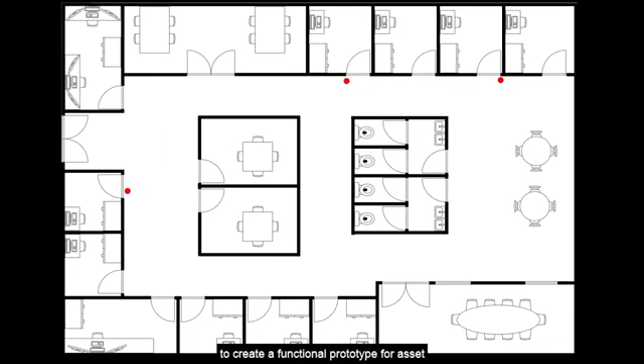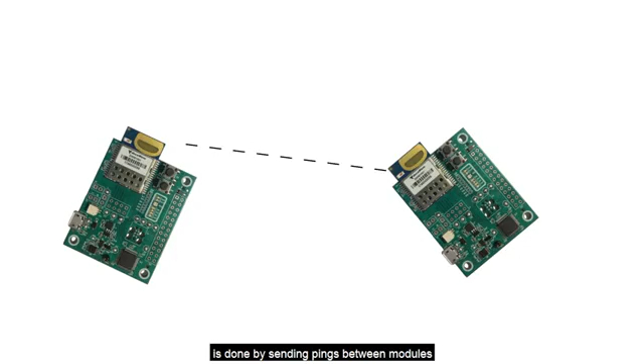Locating items or people when their whereabouts are continuously changing is a difficult and time-consuming task. This senior project was designed to create a functional prototype for asset tracking based on existing trilateration technology created by Decawave. Using this technology, two-way ranging is done by sending pings between modules and using time-of-flight calculations. For real-time position, trilateration is used.

There are two situations considered in this senior design project. The first is called the proximity solution, which involves tracking assets with respect to a specified vicinity. It consists of one base unit and multiple field units. The base unit has three user-customizable distance boundaries for field units. The distance to field units is measured and sent to the mobile application using Bluetooth. Alerts will be triggered on the base unit when field units move out of the user-selected range, both audible and visual.

Upon proximity setup, the user will be able to view the base units within the mobile application once they are powered on. The application connects, then assigns the base unit a PAN ID. Buttons between the field unit and base units are pressed to pair them through Bluetooth Low Energy. The application then receives and stores the information for each field unit paired to a base unit. Runtime can then occur with at least one field unit and base unit. While runtime occurs, the user will still have the ability to modify range distance and sensing mode. Lastly, the user may power up additional field or base units. Powering off the units will remove them from the system.

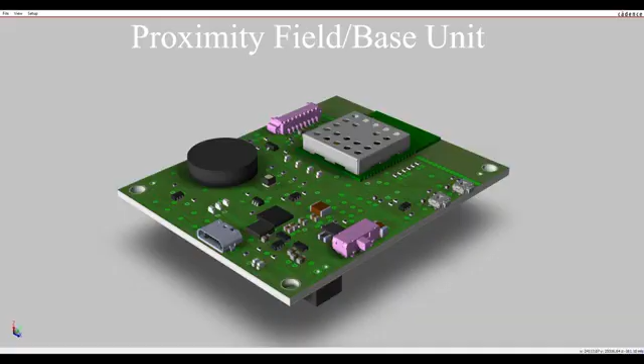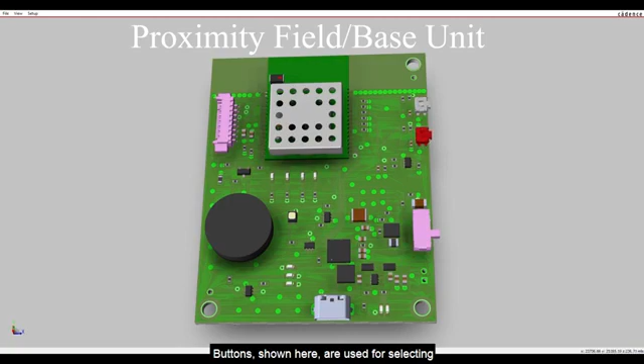This is the proximity solution PCB used for the field unit and base unit. This board includes optional population for the base unit that adds extra alert hardware not included on the field unit. The central component of this board is the Decawave module, used for distance measurement and communication to the mobile app over Bluetooth. A micro USB connector is used for powering the device and charging the included lithium-ion battery. Buttons are used for selecting between the three distance ranges and to pair together field units and base units. LEDs show the user which distance range is currently selected.

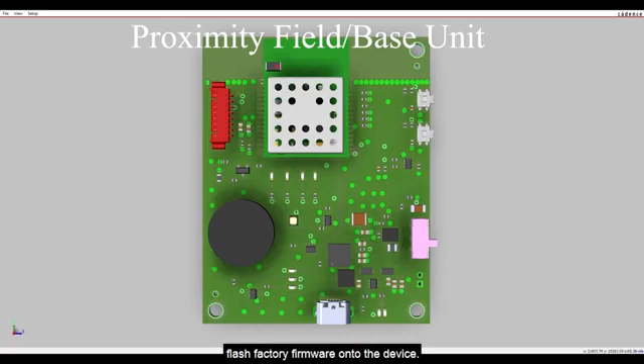Visual and audible alerts let the user know when a field unit has left the desired distance range, using a buzzer and high-power LEDs. The programming connector is used to flash factory firmware onto the device. The battery connector, shown here on the underside of the board, allows for easy stacking of the PCB and battery inside the enclosure.

To get to the proximity solution on the mobile application, we select it from the main menu upon app startup. On the proximity page, we see that every base unit available to the phone over Bluetooth is displayed. Each of these base units can be expanded to show their paired field units. Each base unit and field unit can be selected, and their fields can be edited. For the base unit, you can change the name, short, medium, and far distances, as well as the mode, leaving or entering.

Leaving mode of the base unit means that when each tag leaves the range of the base unit, an alert is triggered on the base unit. Entering mode means that when a paired field unit comes within the range of a base unit, it triggers an alert on the base unit.

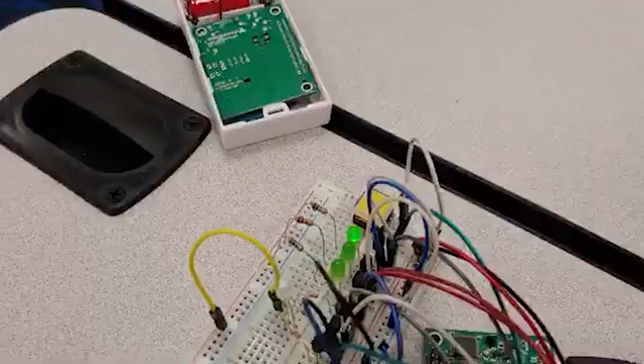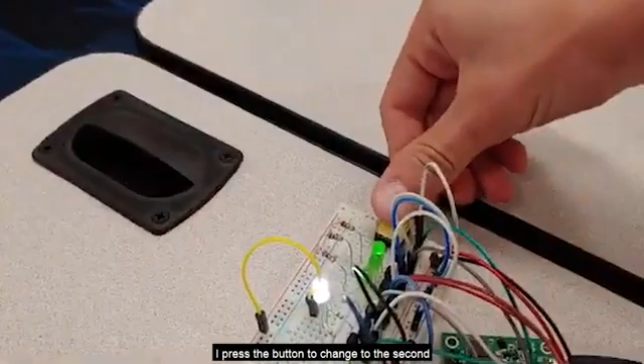This is a demo of the proximity solution. As you can see, there's one LED on showing that this is in the minimum distance mode, currently set to half a meter. As Nolan walks away with the device, once he passes the half meter mark, the LED showing the alert comes on. I press the button to change to the second distance, which is now 1.5 meters.

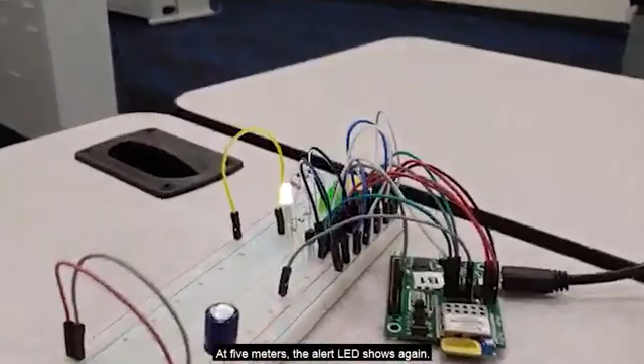As he walks away there, at 1.5 meters, the alert shows again. I press the button to switch to the furthest distance range, which is 5 meters. Nolan will now walk away with the field unit. At 5 meters, the alert LED shows again. As Nolan walks back, the alert will dissipate. Right there.

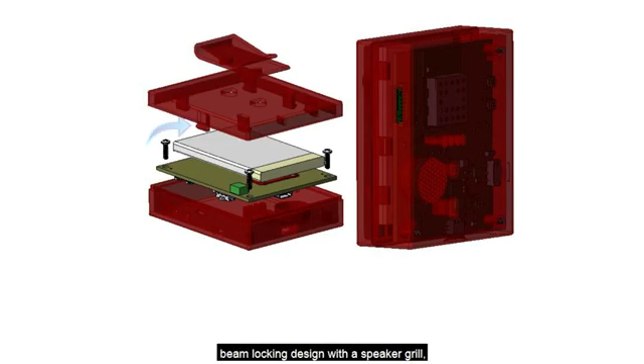The proximity solution utilizes a single device that is flexible to perform as a field unit or a base unit. The ABS enclosure features a cantilever beam locking design with a speaker grill, battery holder, and belt clip fastener holes. The total estimated weight of the custom PCB is 65 grams. The push force of the button is 1.6 newtons. It's less than half the size of a handheld mobile phone and can be assembled in about 50 seconds.

The second situation is called the precision solution, which involves tracking the general location of assets within a building. The precision solution utilizes trilateration to calculate the precise location of a tag. Grids of anchors are assembled to cover an area. Tags communicate with the 4 nearest anchors, finding their direct distance from anchors' fixed positions. Tags then calculate their location. Tag location is then propagated to the gateway, which publishes the information over Wi-Fi to the server to be viewed in the mobile application.

The user begins by selecting the precision option in the application. Anchors and gateways must be paired with the application using Bluetooth. Additionally, the network information must be set up if this is the first gateway pairing. A warning sounds if the minimum number of devices isn't met. Next, a floor plan must be uploaded to the application. The runtime will begin after these conditions have been met. Devices can be added or removed, the ping rate can be modified, and the network can be updated. All updates must be made within the BLE range or warnings will trigger.

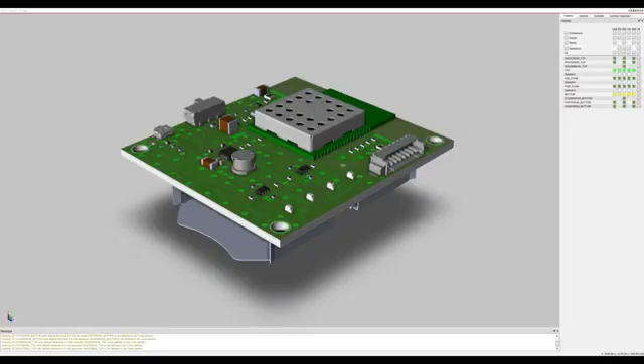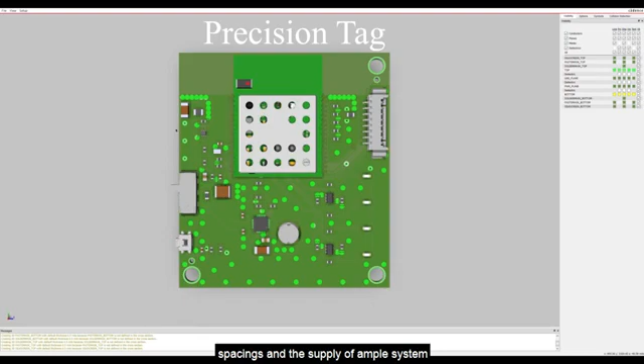This three-dimensional PCB model depicts the tag design for the precision solution. The primary component seen on this design is the DecaWave module. This module is used on the tag to communicate with anchor units in order to perform trilateration calculations to determine its respective three-dimensional position, which it forwards to the gateway. The key design requirements which are reflected on this PCB include minimization of board dimensions and spacings, and the supply of ample system power for longevity of device use.

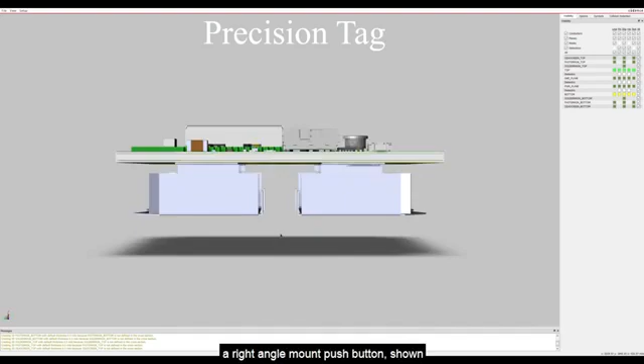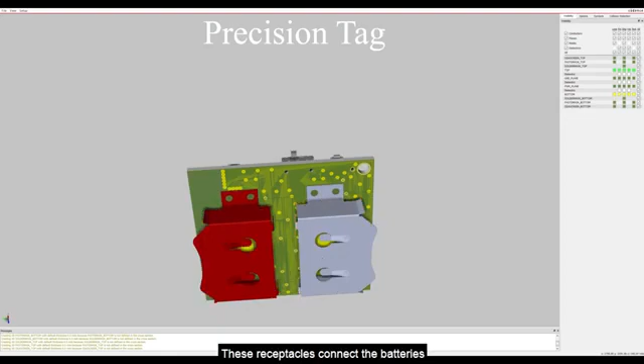Additional components contained on this printed circuit board include a programming connector, shown here, for flashing firmware onto the DecaWave module, 4 LEDs, shown here, for debugging and interfacing purposes, a right angle mount push button, shown here, for initiating Bluetooth pairing and interfacing, a two-way switch, shown here, for powering on and off the device, as well as 2 battery receptacles placed on the back of the circuit board, shown here, to each hold a CR2477 lithium cell battery. These receptacles connect the batteries together in series so that they may provide ample power to the system to efficiently meet long-term power requirements and goals.

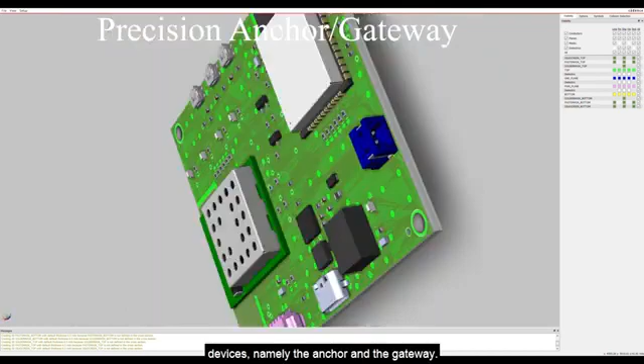This 3D PCB model depicts the anchor gateway design for the precision solution. This design accommodates 2 different population configurations for 2 different devices, namely the anchor and the gateway. This was done in order to reduce the total number of hardware and PCB designs required for the project.

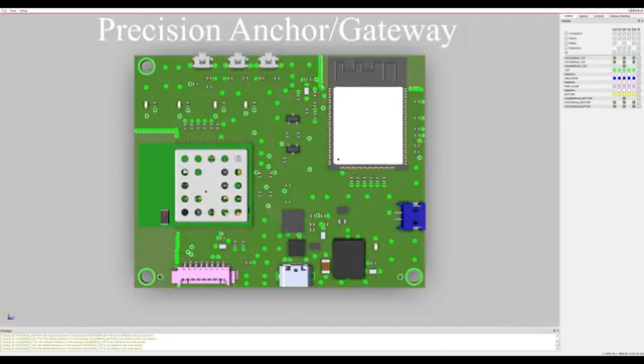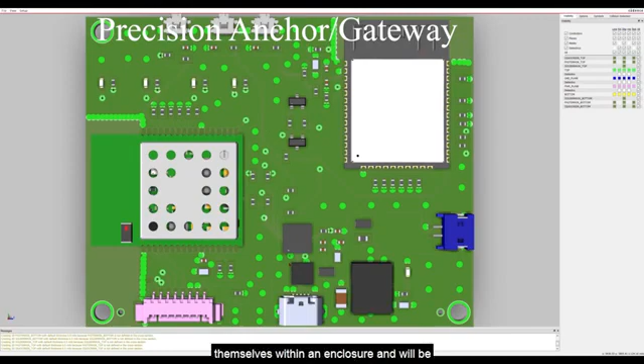The gateway configuration will essentially have all viewed components populated. The gateway design utilizes both the DWM module here and the ESP module here to communicate tag location to the server. Anchor configurations will be placed by themselves within an enclosure and will be powered by the USB connector shown here.

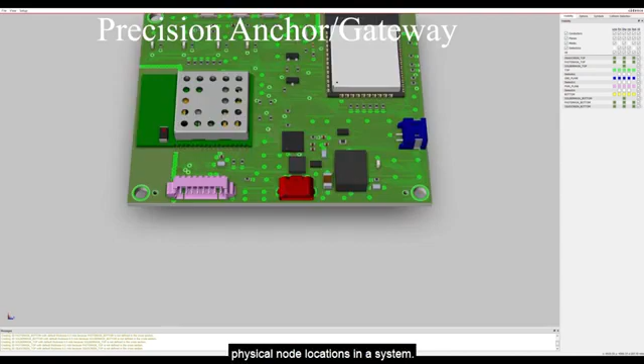Gateway configurations will be placed in an enclosure with an anchor in order to reduce the number of physical node locations in a system. In this configuration, the gateway will receive power via the USB connector and pass it to the co-packaged anchor through the edge connector shown here.

Other key components include the DWM1001 programming connector shown here, the diagnostic LEDs and buttons for interfacing the gateway, and DWM modules for Bluetooth pairing and ESP programming.

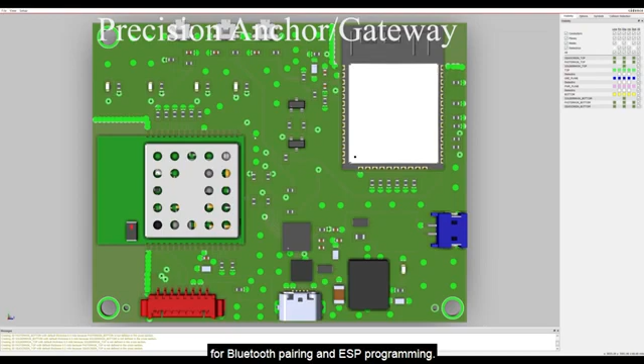Here's the starting page of the mobile application. When we select the precision solution, we will be taken to the map page.

As you can see, it was unable to connect via MQTT. From here, we can open up the main menu, go to the networks page. This networks page contains the server IP address and MQTT port that it uses for messaging, as well as the network name and password that are required by the gateway to connect to the network.

If we change this to the correct MQTT port and select Update, it will save our changes and show that it is connected to the server.

Once back on the map page, we can choose to set the dimensions of the map image. Here are the X and Y dimensions of the map image in meters that correspond to the width and the height of the image. Once those dimensions have been set and the device is connected to the server, you can see that devices are starting to appear on the map that indicate where they're at. In each corner, we can see an anchor.

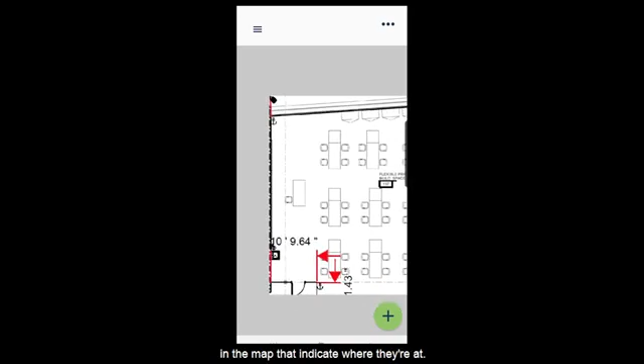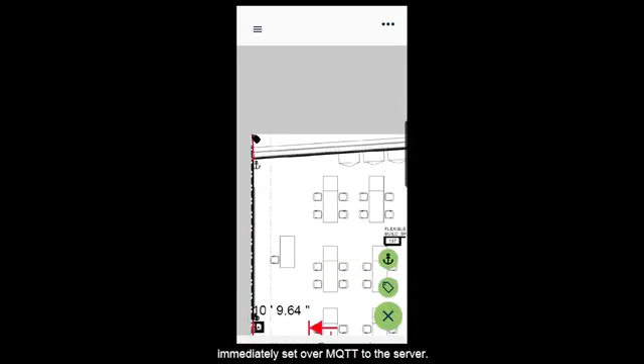Also on this map page, you can choose to add tags or anchors. Here are their corresponding dialogues. Also, if you select on any of the devices, you can see their info, as well as choose to edit them. Any additions or edits to the system are immediately sent over MQTT to the server.

This demonstration conveys a single room with one anchor in each corner. One of them operates as an anchor gateway. There are 2 fixed tags that will be staying stationary during this test, and 1 mobile tag that Evan will be carrying around.

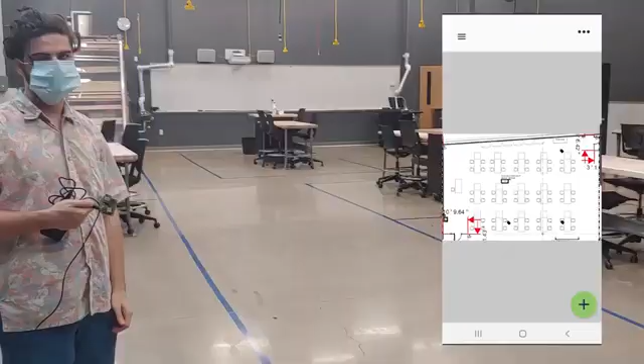Evan will now be walking around the cage holding onto a tag. As he moves, his tag's location will be updated accordingly on the map.

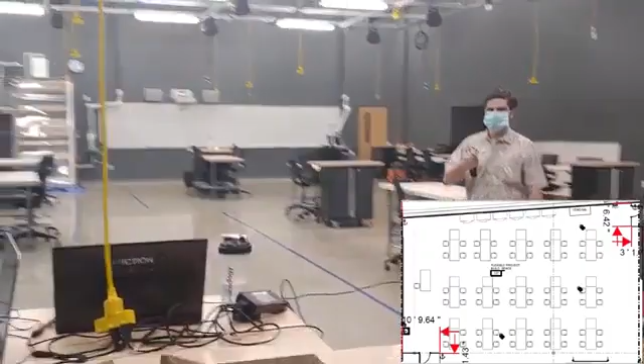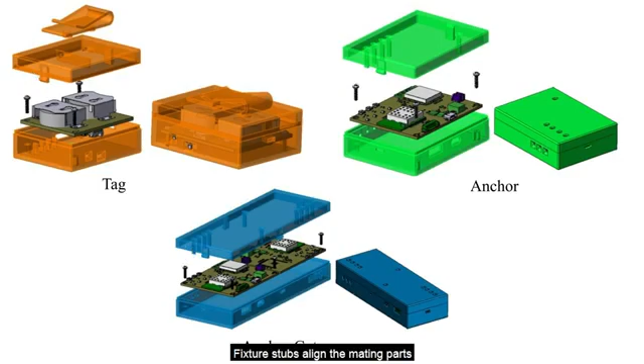The ABS enclosures within the Precision solution are for tags, anchors, and anchor gateways. They each utilize the same cantilever beam locking design. Fixture stubs align the mating parts in one way, and the PCBs are fastened with self-tapping screws into bosses.

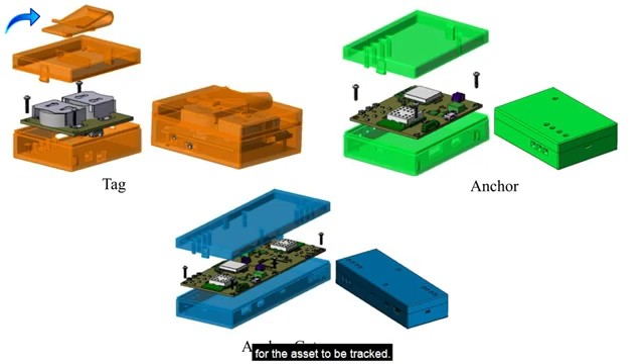The tag is able to be fitted with a belt clip or Velcro for fastening for the asset to be tracked. Both the anchor and anchor gateway enclosures will utilize Velcro to be fastened to walls within a room in a grid fashion. The weight of each unit is under 0.2 of a pound, and 1.6 newtons is the required push force for buttons.

The anchor and tag are less than half the size of a handheld mobile phone, whereas the anchor gateway is roughly the same size as a mobile phone. Lastly, each assembly can be completed in under a minute.

The main specifications for the project are as follows. The Precision solution must track tags at a minimum distance of 20 feet with a 6-inch tolerance. The ranges of the proximity solution must be able to change to 3 different radii.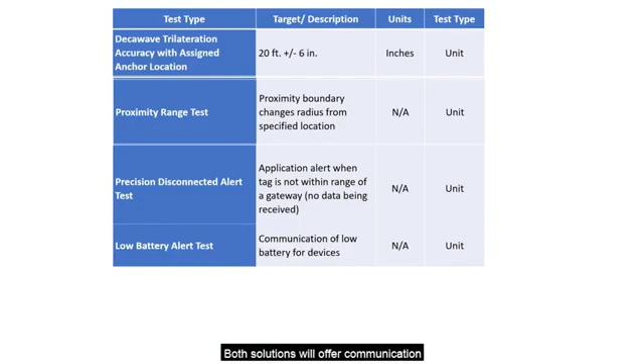An alert for a tag must activate when disconnected from the gateway. Both solutions will offer communication of low battery of the devices, and the server must be able to send and receive data. At the time of this recording, the summary of the project performance cannot be done as the project is still in progress.

Due to COVID-19, the original project changed by not 3D printing the ABS enclosures, modifying the Decawave development boards instead of creating custom hardware for each of the devices, and the Precision solution became a single-floor solution. However, the mobile application will still reflect the ability to change tracking between floors.

The overcome challenges were Bluetooth enabling using Zephyr, using multiple antennae at the same frequency on the same board, UART interfacing and data acquisition from the available API, creating a server with a database while interacting using MQTT, and overlaying selectable images on the mobile application map.